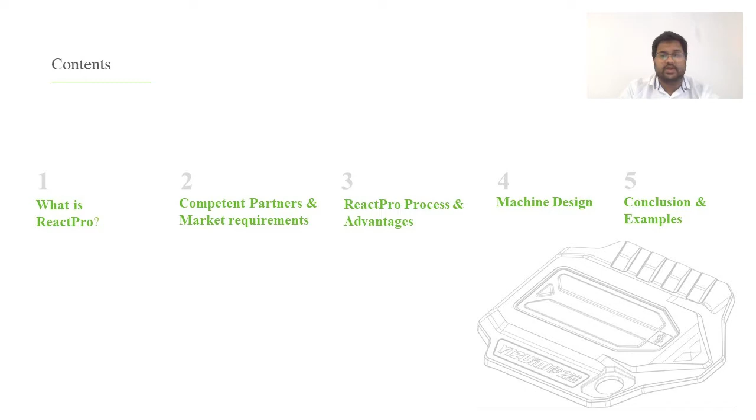Part one, as I mentioned before, what is the ReactPro process? Everyone is thinking it's a complicated technology, and it can't be achievable. But honestly speaking, this technology has really smooth, easy and quick process steps involved, and we name it the ReactPro process,

and it's like injection molding meets polyurethane. It's a combination of technologies, injection molding and polyurethane: we produce the thermoplastic base part with the polyurethane decor on top of it. It is a highly integrated and fully automated process, and also rugged parts with high quality surfaces are seen in this presentation.

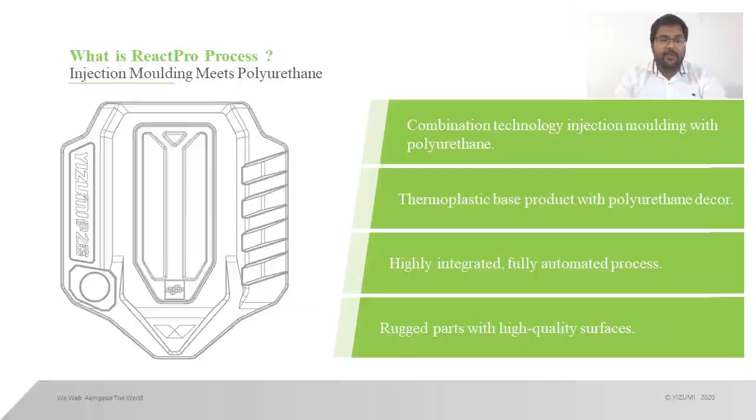Competent partners are involved in the injection molding machines, polyurethane processing, mold design, and material. These are all our partners involved in this technology. Frimo is a polyurethane system supplier, and Rühl is a material supplier. AF Color and Akro Plastic are thermoplastic suppliers, and GK Concept is the mold design. We will discuss in the next slides each partner and how they're professional in their network.

Regarding Yizumi, Yizumi is second worldwide in machine sales, offering complete solutions to the market and expanding globally, and we also have a new research facility in Aachen.

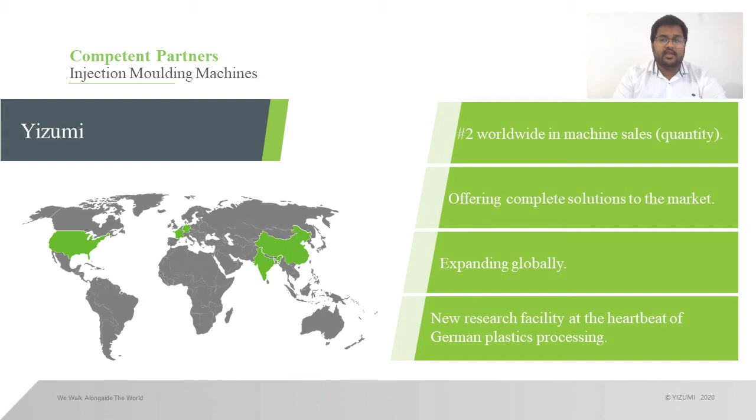The PU system supplier is Frimo. It's a full service provider of production systems for manufacturing high quality plastic components. Frimo's metering technology for polyurethane part manufacturing is as versatile as the material itself. It offers highly specialized solutions used in numerous industries, and the compact and modular design saves space and increases flexibility of using the PU systems.

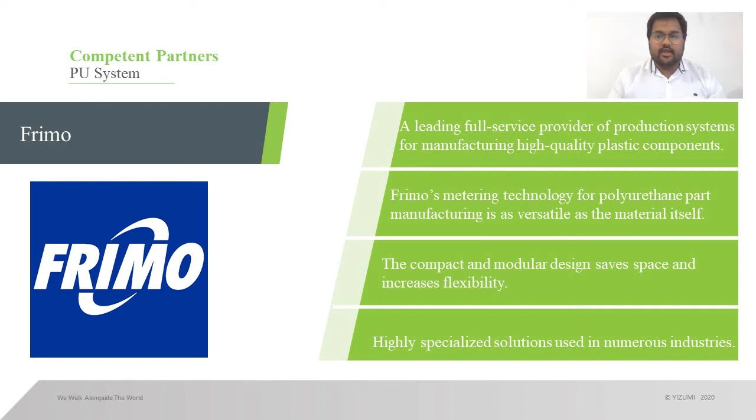Our competent partner for the tool design is GK Concept, located in Dresden, a powerful partner for high performance molds and engineering for the injection molding industry. They have know-how from 20 years of product and component development, and they do the simulation, tool design and project management in the tool and support.

They extend support to OEMs, and they also have 40 years experience in tool making, process development, and process technology, and an environment of elite universities, research institutes, and high-tech clusters.

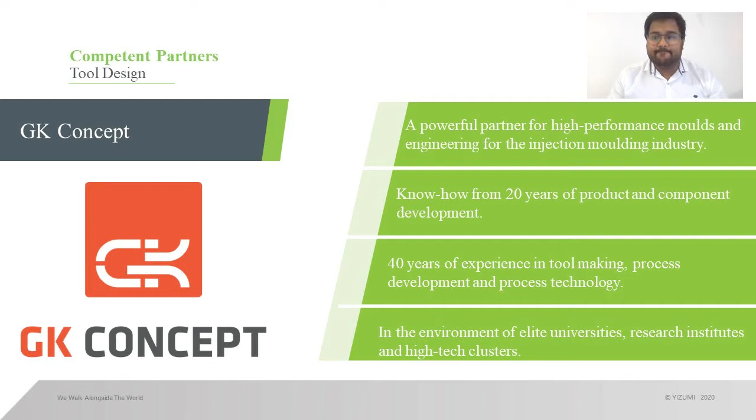The competent thermoplastic partners are Akro Plastic and AF Color. Both are specialists for innovative and application oriented plastic compounds, with over 30 years experience in Germany. Their production is around 165,000 tons of plastic compounds every year, and they're constantly producing innovative solutions for the market.

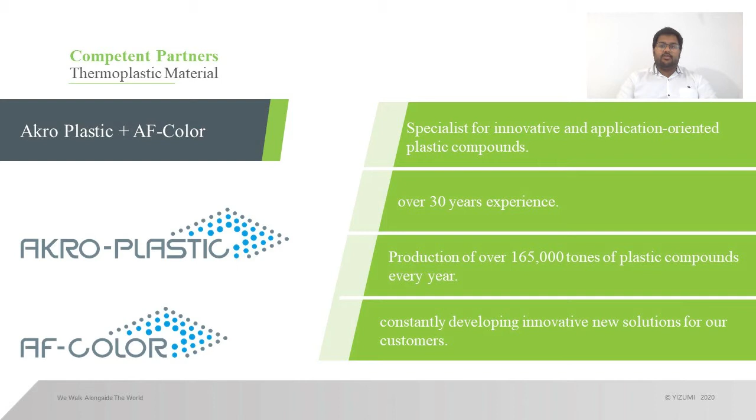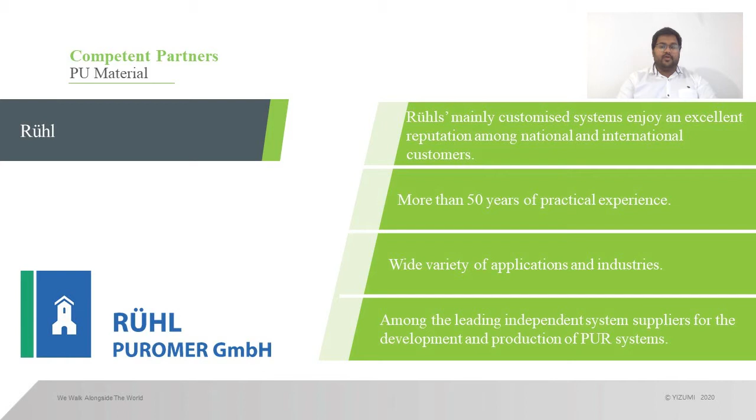Another competent partner is Rühl, a material supplier for the polyurethane. Rühl mainly makes customized systems, enjoying an excellent reputation among national and international customers, with more than 50 years of practical experience and a wide variety of applications and industries. They are among the leading independent system suppliers for the development and production of PU systems.

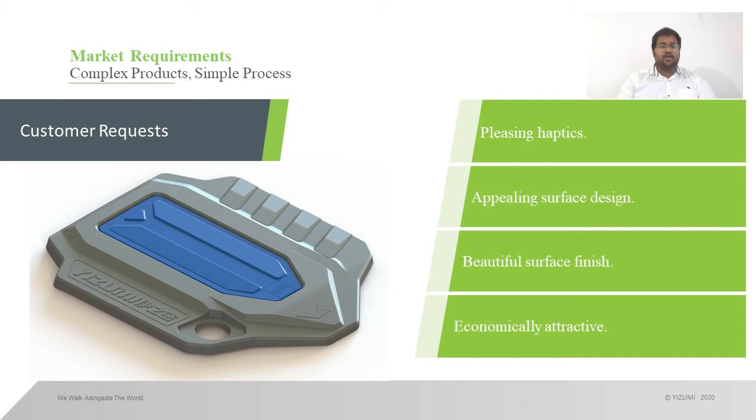Next topic is the market requirements and the customer requirements. There are complex products and a simple process. The customer requests are pleasing haptics, an appealing surface design, a beautiful surface finish, and being economically attractive. All these are in this ReactPro technology, which pleases the customer in an innovative way.

We have the solutions for the market: we apply a thin layer with desired optical and haptic properties and integrate the surface finishing process into the production process, avoiding additional production steps. For example, normally if you want to manufacture this product, you do painting or coating. You can avoid these additional production steps, with less processing time, and it's cost effective, and moreover it's a single step production of the part.

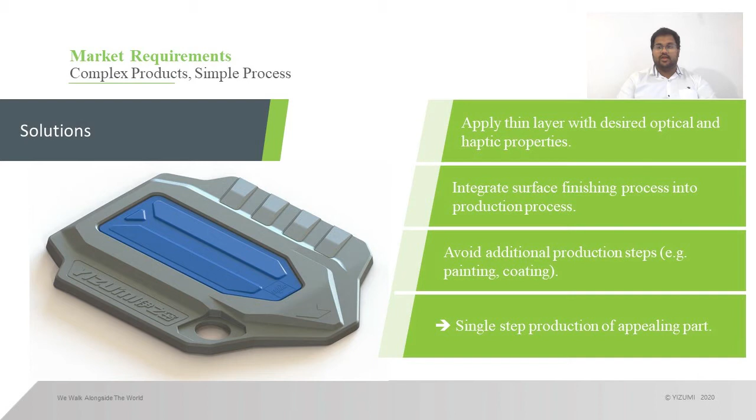This whole part has been manufactured in one single step, which pleases the customer.

So in part 3 we are discussing ReactPro and its advantages. We have an intelligent concept, and the clever design reduces the complexity of production. The intelligent concept is InPUR 2 plus 1: we have one thermoplastic cavity and two PU cavities, with alternating placement. As you can see in this video, first we inject the thermoplastic part.

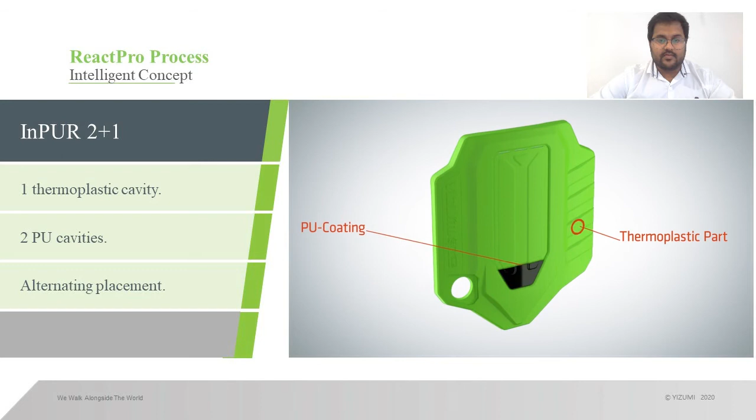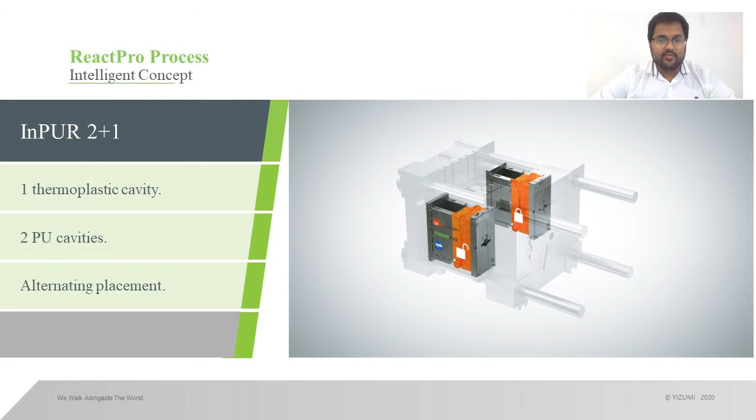So now the part has been transferred in the one PU cavity, and it was closed, and you see the thermoplastic was placed in the PU cavity too, and the PU is injected and molded or coated. And in the next step, the tool will be locked to the fixed side of the injection molding machine, and now the thermoplastic will transfer to the other part of the PU tool, and it will be closed again.

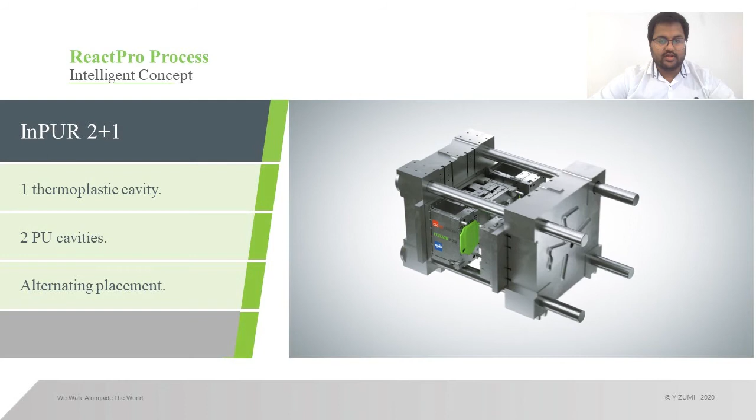In the next step that will be locked. PU tool 2 will be locked, and the PU tool will be released and fixed to the moving platen. And if you see now, again the finished part will come outside, and now again the thermoplastic will be placed in the PU cavity 1, and then again the finished part will go outside, and the thermoplastic will be placed in PU cavity 2 again, and it will be locked.

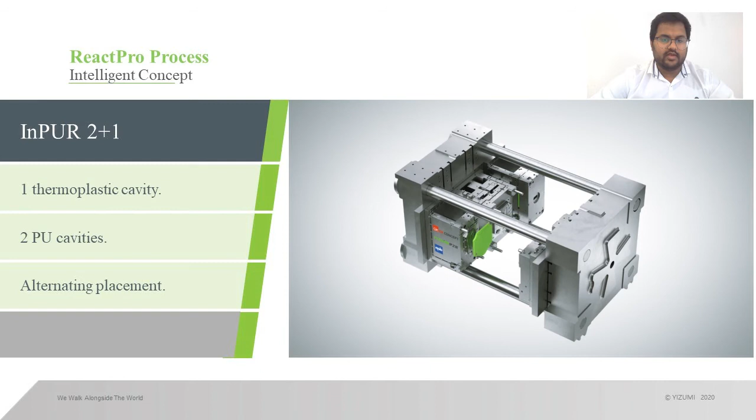And we have a lock system for each tool. The moving side will be locked onto the fixed side for alternate cycles, and the finished part will go outside. See, now again plastic is placed, and the tool will be locked here, and the tool will be unlocked here in the system. And we could also see again clearly, plastic is placed. Now the moving side platen is locked and unlocked on PU cavity 1. It's placed and unlocked 2, 1.

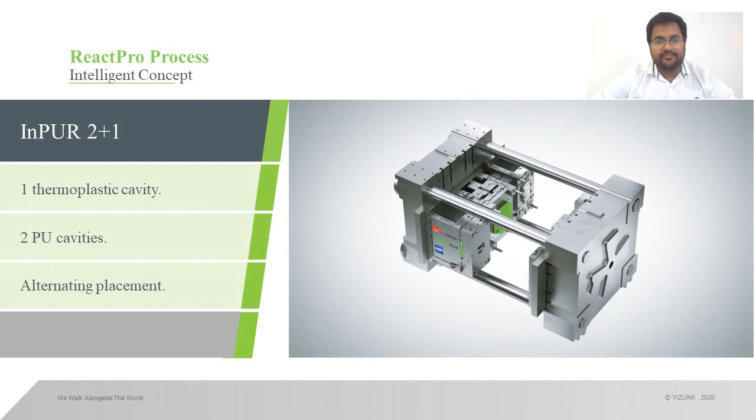It's alternating procedures, and you don't need a machine of high complexity, like a rotary platen or swivel unit; we don't need them in this case. The tool itself is intelligent, so it reduces the cycle time for each product. Normally PU takes a high cycle time. This one takes less cycle time compared to the other process technologies.

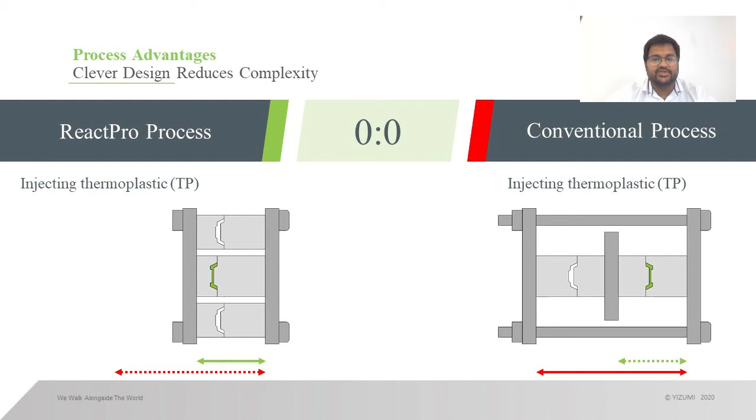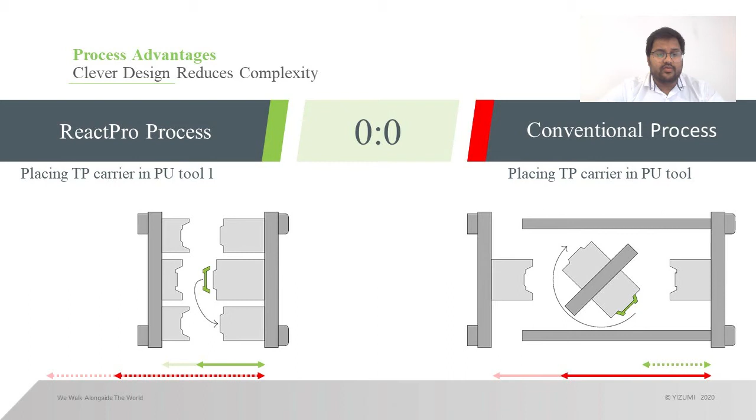Continuing from the previous slide, you see here the placing. We are placing the thermoplastic carrier in PU tool 1, and in the conventional process, the complete carrier is transported to PU tool 2, and then it's placed in the PU tool. And if you go to the next slide, you see now we place the thermoplastic carrier in the PU tool, and the tool will be closed.

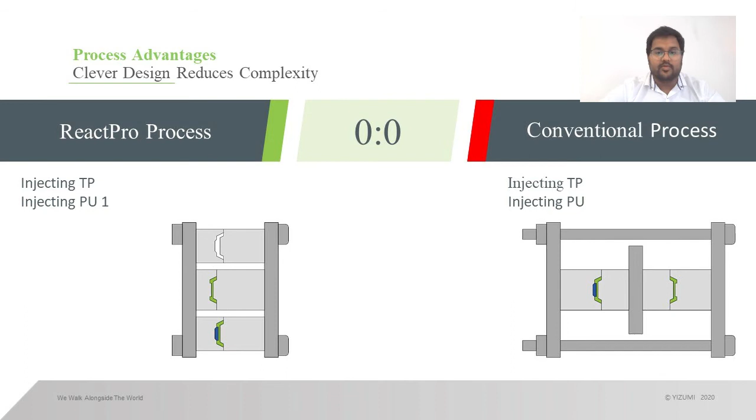In the next step, we inject in parallel. We inject the thermoplastic part, as well as injecting polyurethane in PU tool 1, and in the conventional process we also inject the thermoplastic part as well as the PU injection.

And in the next step, now the tool will be open, and the moving side of the PU tool will be locked to the fixed side of the PU, and it will transfer to PU tool 2. It's placed in PU tool 2, and again it will be closed in the next step. And still we are waiting for the PU polyurethane reaction time.

So now again we close our mold, and still we are waiting for PU, and we now inject the thermoplastic part in parallel, and still we are waiting for PU in the conventional process. And now we are ejecting one part from PU tool 1, taking it outside with the robot, and at the same time in the ReactPro process the part will be placed in PU tool 1, and meanwhile we have reaction time in PU tool 2.

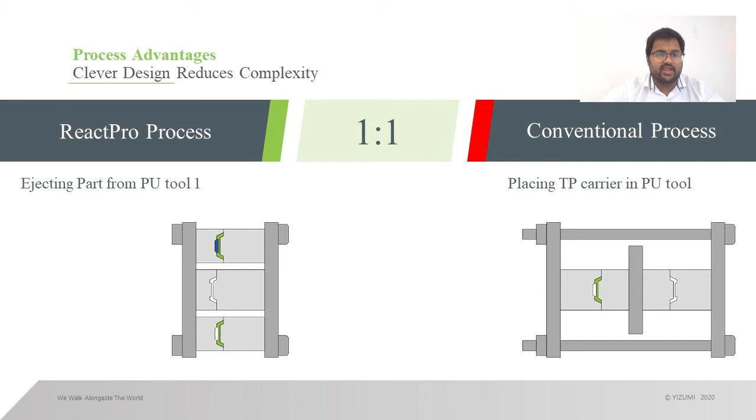In the next step, again we are ejecting the part from PU tool 1 and placing the thermoplastic carrier in PU tool 1, and now ejecting the part from PU tool 1 and placing the thermoplastic part in PU tool 2. In the next step, we inject the thermoplastic part and inject PU1, and in the same way in the conventional process we inject the thermoplastic part as well as polyurethane.

It's one to one part we got now here, and we transfer the thermoplastic carrier to PU tool 2 and wait for the PU reaction time. So now we eject a part from PU tool 2, and we got one part from the conventional process and two parts from the ReactPro process. You see, it is two to one, and still we are waiting for PU.

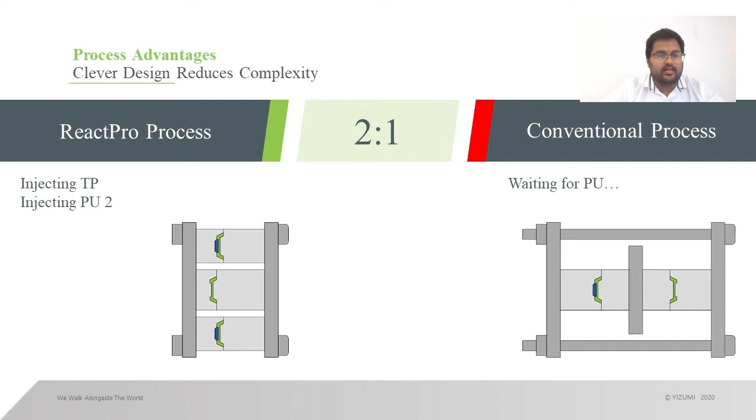In the next step we're ejecting the part from PU2 and still waiting for PU2. And in this case we are injecting thermoplastic and polyurethane in parallel in PU2, and meanwhile waiting for the PU in the conventional process. Now we transfer the thermoplastic carrier into PU2 and we are ejecting the part from PU2 in the conventional process.

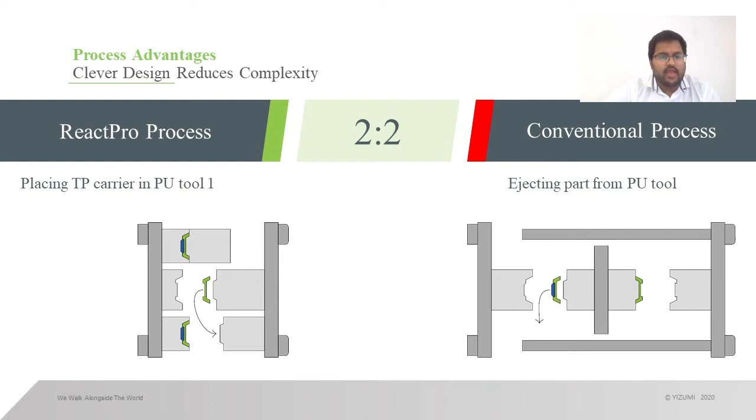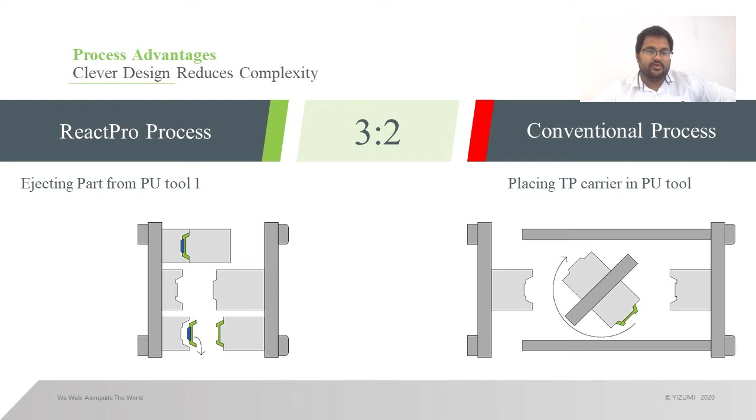Now we have two parts equally, and we also eject a part from PU tool 1, and we have 3 parts in 2 cycle times, and placing the TP carrier in PU tool 1, and now we're ejecting the part from PU tool 1 and placing a thermoplastic carrier in the PU tool.

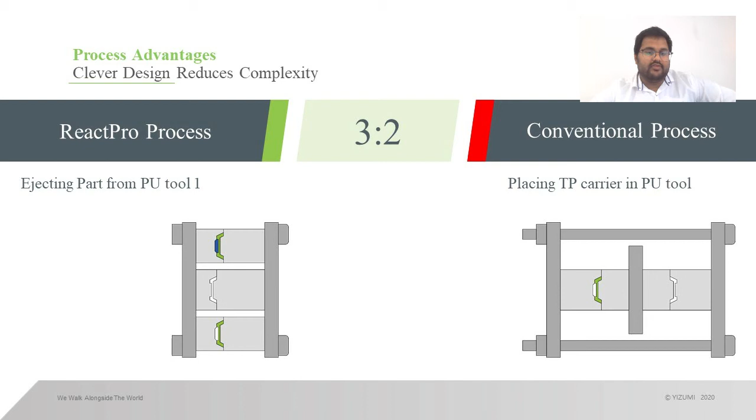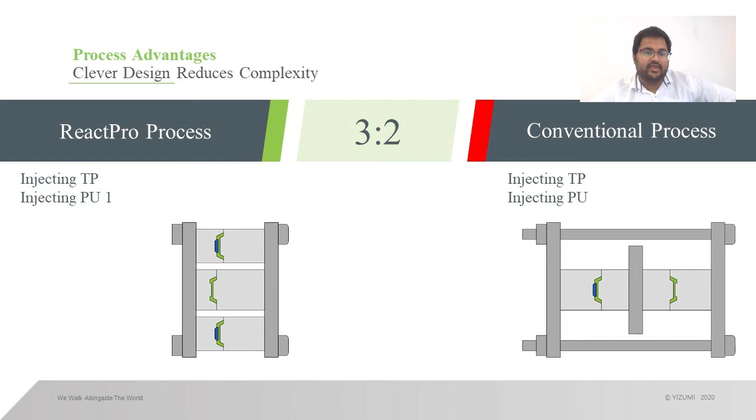In the next step, you see we are injecting the thermoplastic again, and in parallel injecting the polyurethane in cavity 1, and we are also injecting in parallel in the conventional process, injecting TP and injecting PU, and placing the TP carrier in PU tool 2, and we're still waiting for the polyurethane reaction in the conventional process.

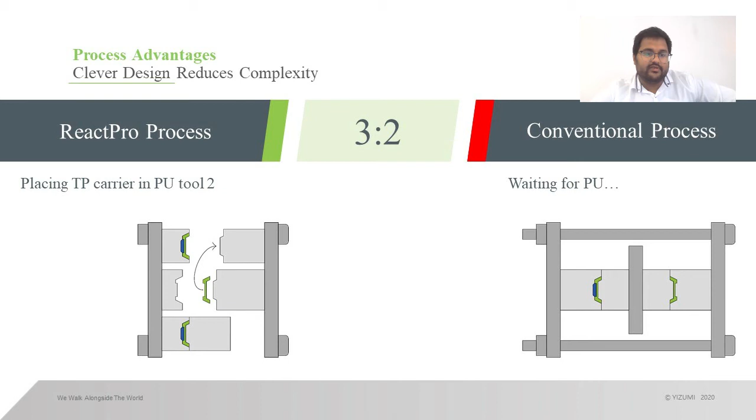And we take the part from PU tool 2, and we have the 3 parts already with the 2 cycle time of the conventional process. You can see the cycle time can be reduced drastically with this design, and it reduces the complexity of the complete process.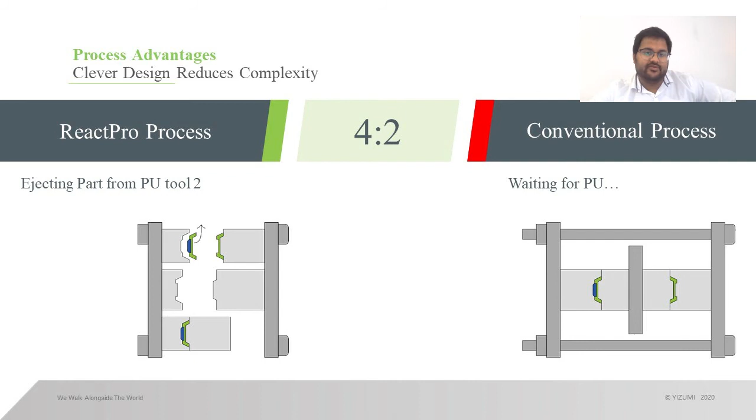Now we also discuss some advantages between the ReactPro process and the conventional process. Normally ReactPro technology needs a short daylight and small footprint, with no need to have so much distance between the tie bars, and in the conventional process a long daylight and large footprint, which is really not good.

And also the curing time and reaction time: this process allows longer curing time, and the longer curing time for the PU is critical in the conventional process. And we can use a standard machine, so you don't need to buy a new machine for this polyurethane technology. We just need to retrofit the machine with an extension for the PU systems.

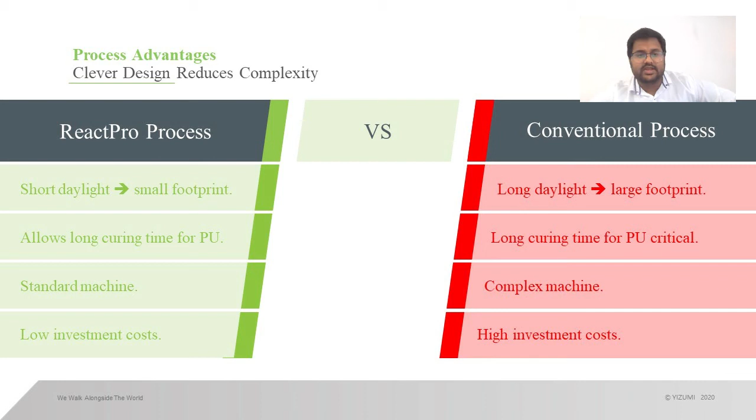In the conventional process, we have a complex machine, and the tool cost is also high, and here we don't need to invest a lot of money. We just have a low investment cost compared to the conventional process, and we also have some material advantages, like ReactPro is a PU coating versus painting.

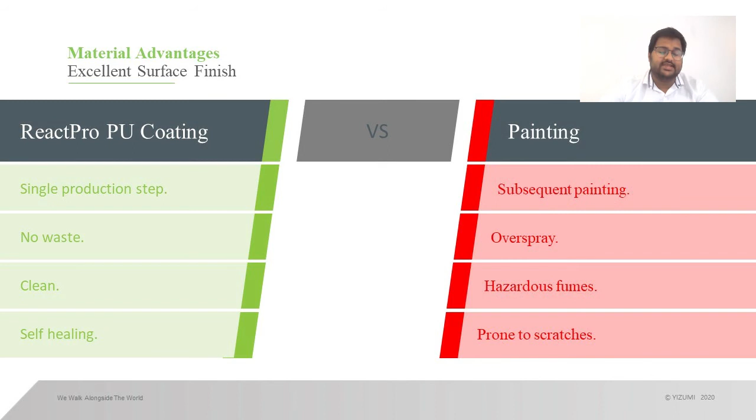Normally if you want to have a high quality surface: a single production step, no waste, and cleaning and self-healing. And if you check with painting, it's a subsequent painting, with overspray and hazardous fumes and prone to scratches. This is best. We have an excellent surface finish of the part, as you can see in the previous slides.

In part 4 we can also see the machine design. It's a modular machine design for high flexibility and low complexity, where you can see the ReactPro machine. On the back side you see the technology of a PU system integrated in our injection molding machine. It's a modular design and a standard machine, and it's a retrofitable solution.

Normally, if you want to have a conventional serial unit, like a rotary platen machine, you need to wait a longer time to get a machine in your factory. But here it's a short delivery time, since you have a normal standard machine, a small footprint, a low investment cost and high flexibility to retrofit this PU system on the backside of a machine.

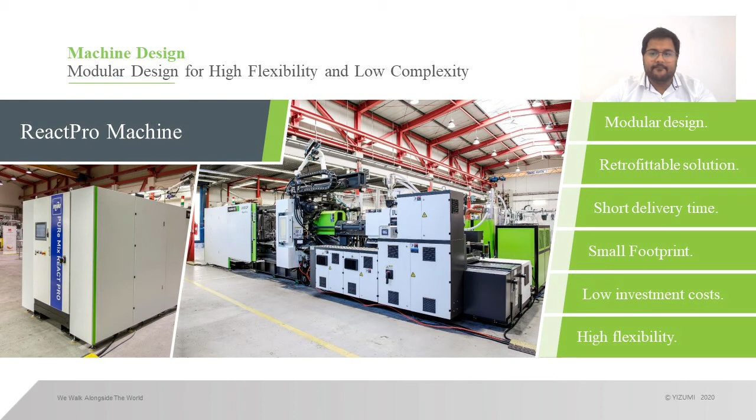We can have a conclusion combining the advantages of two worlds and a wide range of applications, as you can see in part 5. The advantages are an efficient solution for complex multi-component parts, high design freedom and excellent surface finish, like a high quality surface, and it's a single step production, and the cycle time has been reduced to half of the normal

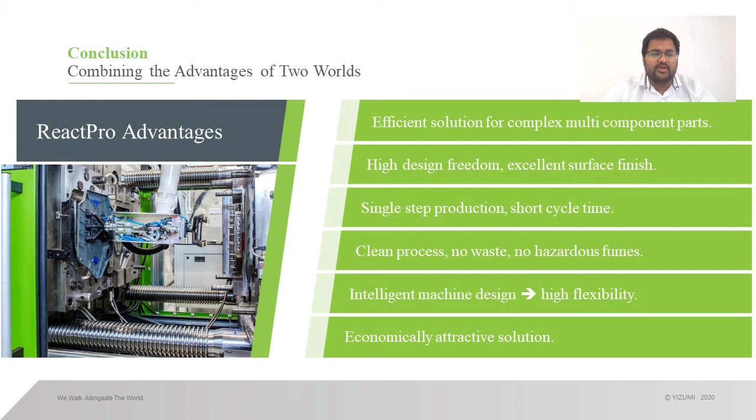conventional process. Shorter cycle times are allowed in this process, and it's a clean process, no waste and no hazardous fumes, and the intelligent machine design gives you high flexibility for the PU systems, and economically it's an attractive solution for the overall market.

And if you go with the applications, for the automotive industry, home appliances, and also the medical industries, here are some examples where we're focusing on the automotive industry: the BMW X7 dashboard, the car key for the Bentley, and a handle for the Bosch household appliances.

So this process is really capable of giving you the flexibility of combining two worlds in a simple way, and also an efficient solution for complex parts, and gives you an economically attractive solution for overall

the process. From the investment point of view, it is really an ideal solution, and for this technology you don't need to invest a lot of money, you just need to have a standard machine which can be retrofitted to our PU technology.

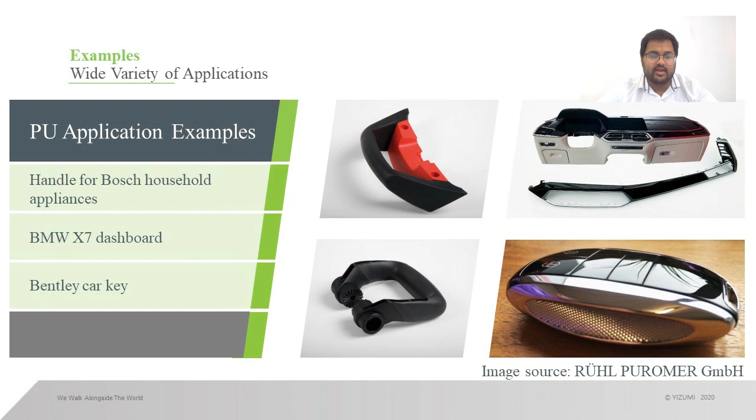Moreover, if you really compare our ReactPro process and the conventional one, it takes away the hassle with the daylights, and gives a low investment cost for this particular ReactPro process compared to the conventional process. This technology gives you cycle time benefits compared to the normal conventional process, and the complexity is really less compared to other conventional processes.